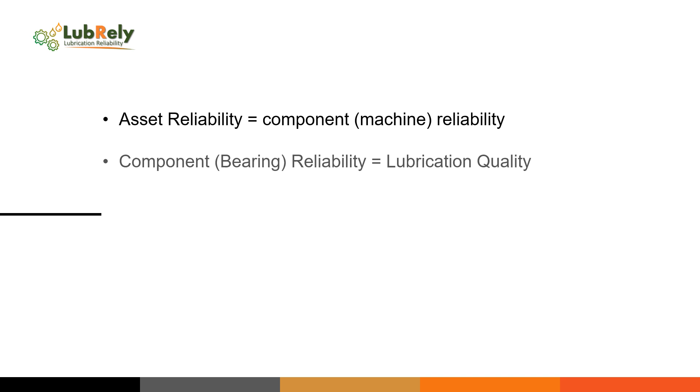Back to the beginning. If we think about the reliability of a machine, that's in general referred to as asset reliability. A component of course can be a bearing. So we could say bearing reliability, or component reliability, but the reliability of that really equals the quality of the lubrication process, or the product itself.

And quality lubrication, as a concept, the excellence of, also equals the 6 lubrication rights. These rights cover a set of questions that one would ask about any particular lubrication point in the machine. If you would answer no to any one of those points, then you have a problem with your lubrication reliability.

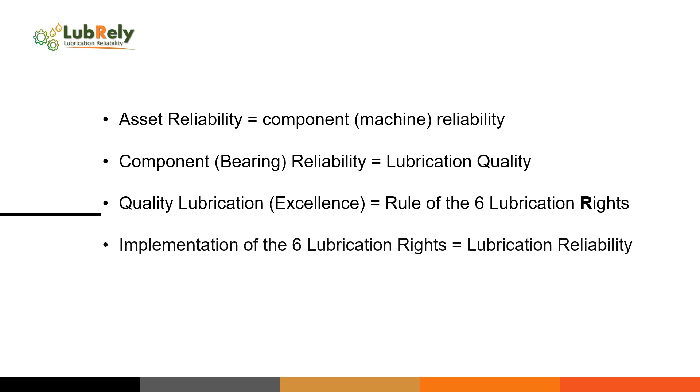The implementation of the 6 lubrication rights is really the foundation of lubrication reliability. So if you answer yes to all of those 6 questions, then you have a good lubrication reliability strategy in place. Lubrication reliability really covers 10 fundamental steps, 10 things that one needs to do to ensure that again we say yes to all of the 6 lubrication rights.

The focus fundament, and this is the basis of the whole thing, is the storage of the lube. It's the conditioning of the lube. It's how we dispense the lube and how we monitor the process. If those steps are not in place, all of the other 6 steps in the whole 10-step fundamental process will not work.

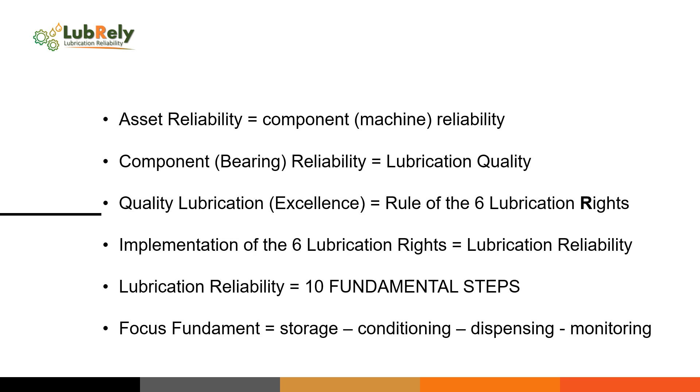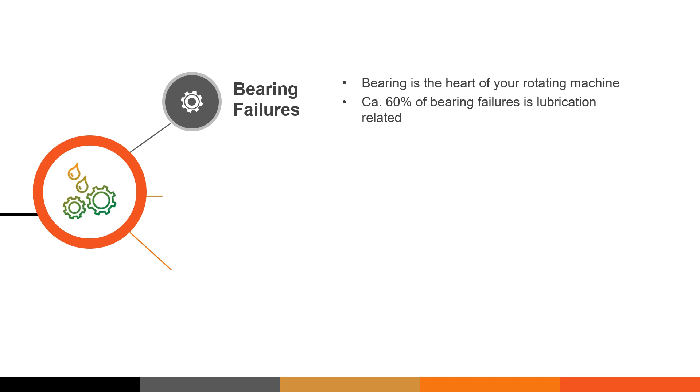So, a little bit about facts and physics. Bearing failures. Bearings are really the heart of the rotating machine. If the bearing fails or is disturbed in performance in any way, so does your machine fail. We know from statistical analysis and work over many years that about 60% of bearing failures are lubrication related, and there are many things under that concept, lubrication related.

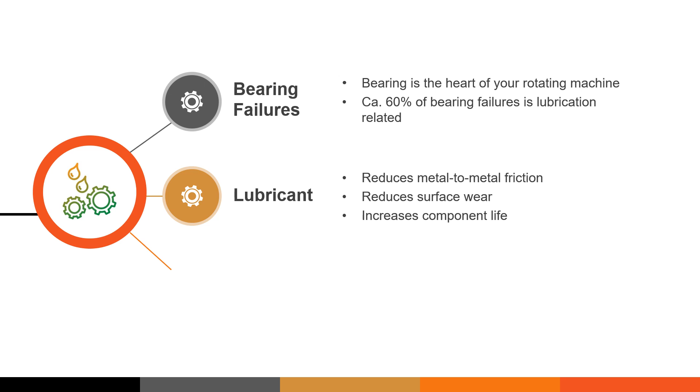The lubricant is really the lifeblood of the bearing. It reduces metal-to-metal friction, because it separates the rolling elements, or the moving components in the bearing or in a machine. And in separation, it reduces surface wear. It minimizes surface-to-surface touching, and as a result, a reduction in wear is an increase in component life.

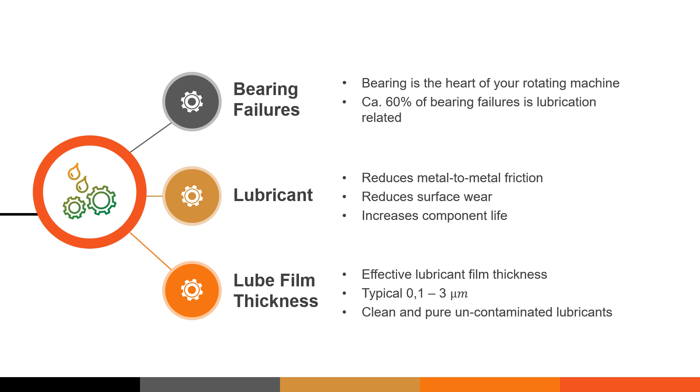The key to the whole thing is really the lubrication film thickness. In order to have a good bearing operation, we need to separate those components with a lubricant. This is called the lubrication film thickness. And typically, it's very small. It's 0.1 to 3 microns. So it is critical. Clean and pure, uncontaminated lubricants are critical for this application. And this is what we're trying to do with the concept of lubrication reliability. We're trying to make sure we have a very good lubrication film thickness.

Now, let's have a look at the effect of wear, or contamination in an oil, on bearing life. Bearing contamination and its effect on life was well known back in the 80s, and a lot of work was being done then by a lot of the big companies. For instance, SKF in Sweden did a lot of research work, what they call the SKF New Life Theory. They were trying to find a way to build into the life calculation of the bearing a parameter that considered the contamination level within the lubricant.

If you knew the type of contaminants and the size and amount of those contaminants, you could factor these into the equation of bearing life. It could go down or it could go up.

Now ISO also got involved in this, and they started to develop a strategy, which is today known as Standard ISO 4406, where they measured the number of components in 3 different size groups. In this case 2, 5 and 15 micron in 100 milliliters of oil. And with each of those amount of quantity they are given a code.

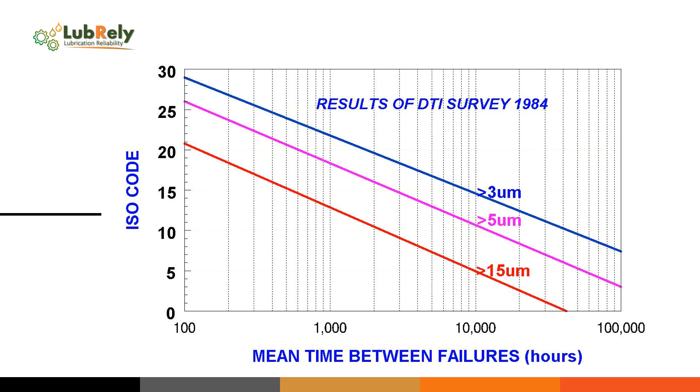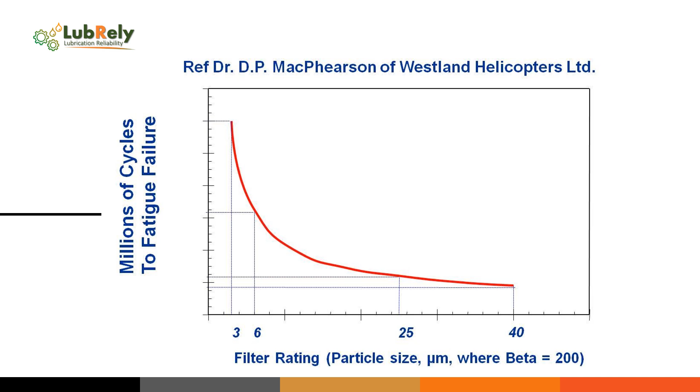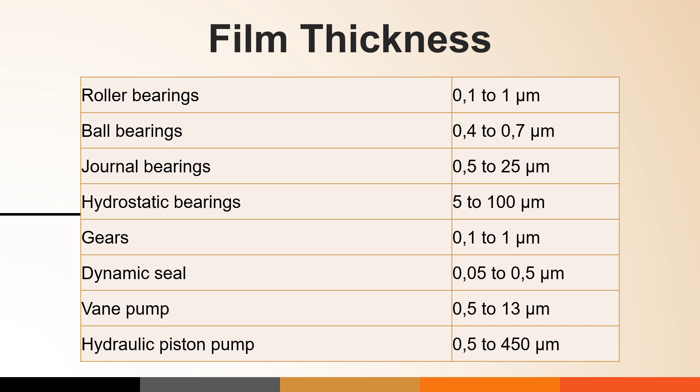Talking about film thickness. How much film thickness can we expect in different applications? It varies roughly between 0.1 and 450 microns. Most of the time, when talking about bearings and gears, we talk about a 0.1 to 5 micron range. Exceptions are journal or hydrostatic bearings. Here we are talking about a larger film thickness. To put that in perspective, how big is 0.1 to 5 microns?

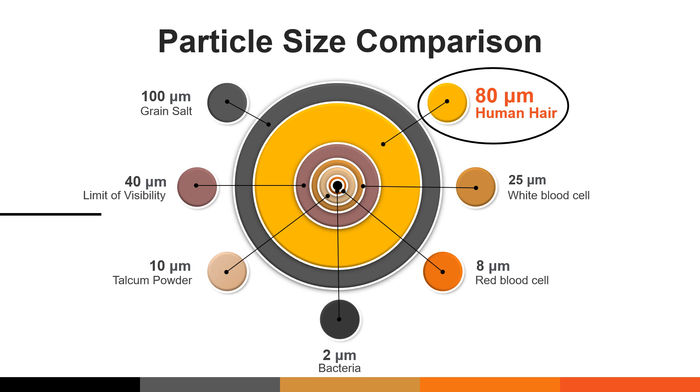In this overview we are comparing various particle sizes. Human hair, for instance, is circa 80 microns, whereas white blood cells are 25 microns. Already at 40 microns, there is a limit of visibility. As you will see in the slide hereafter, the film thickness of a bearing is roughly 1/20th of a strand of hair. This means virtually invisible to the naked eye.

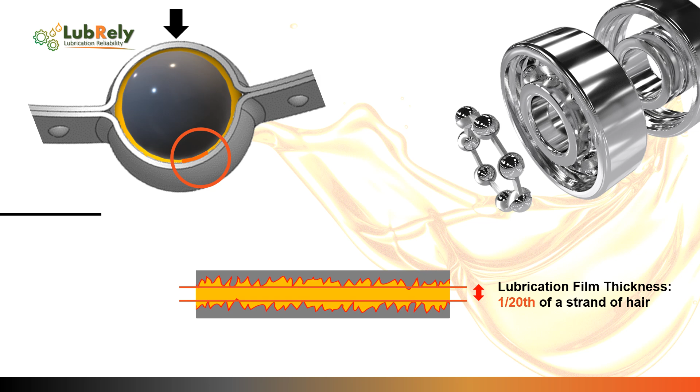Finally, we arrive at the point where this chapter is all about. How does wear really start? If you take this cross-section of a ball and an inner ring, you can see the load zone. This load zone is separated by the lubrication film thickness, which is very small. So small that if you pluck one piece of hair out of your head and put it under a microscope, and with surgical tools were able to cut it 20 times slice-wise, that's the thickness of the lubrication film in a bearing.

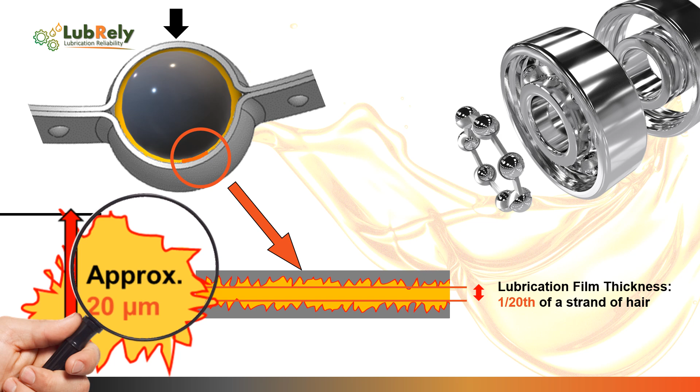So think about this: if you've got a piece of silica sand floating around the warehouse, or the factory, or the store, and it's 20 microns in diameter, and as you have seen in the slide before, you can't see 20 microns, and that goes through the bearing, it would have the same sort of effect as if you drove your car over a rock about a meter in diameter. So this is how wear really starts.